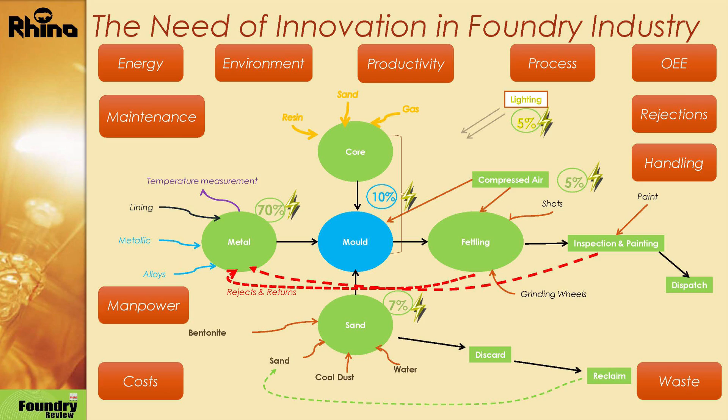The first one, which we did around 2012, we started working on an EcoFlex sand plant, a sand handling system innovation using belt conveyors instead of bucket elevators. The first foundries who embraced this were Varsha Iron in Belgaum and Sagar Ferex in Rajkot, small and medium sized foundries. We are more and more identified with MSMEs, and these companies have taken up this innovation.

One of the unique parts of this innovation is we have hosted lunch in a working foundry beside a working plant, two times in 1.5 years, and many people have seen it. The last was hosted by the Belgaum Foundry Cluster a month back, and I'll share a video link if anybody wants to see how you can create an environment which a person will enjoy working in.

So this was the users, and the innovation was recognized because of the deliverables. As I said, innovation needs to have an impact. One of the biggest impacts was a 30 to 50% lower consumption of power — installed power — which has huge value across the total foundry scenario: nearly 7,000 megawatt hours of energy every year for Indian foundries, which is not a small value. At the same time, as I was saying, it provides a healthy and safe working environment.

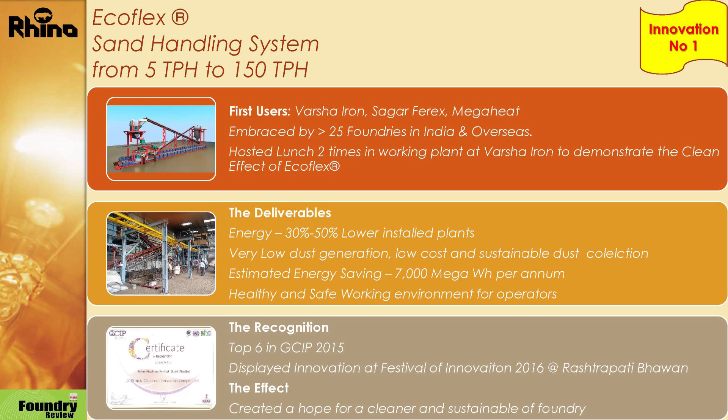The second has been the molding process. My father always used to say we'll never make a jolt squeeze machine in our life - we never used to make molding machines. But he always believed that if you want to make a machine, it has to be high pressure; otherwise, never make a copy of a jolt squeeze machine. We've been working on this since 2008, 2009, and it was displayed at IFEX 2010 when Mr. Panchal was head of that program, and we were one of 3 people recognized.

It is already working in 25 foundries. We have enabled small foundries producing 100 tons per month to upgrade their process from hand molding to high pressure molding, taking a big step forward in process control. There are 3 - PEFCO in Pune also has 2 machines right now in production, replacing jolt squeeze machines.

Again, looking at the impact, this product has once again been selected in the Global Clean Tech Innovation Program, represented by our engineer Gajendra, where we have savings of 30% as compared to compressed air - we use hydraulic energy. Combined with the reduction of weight variation, the impact we consider is nearly 31,000 megawatt hours of energy every year.

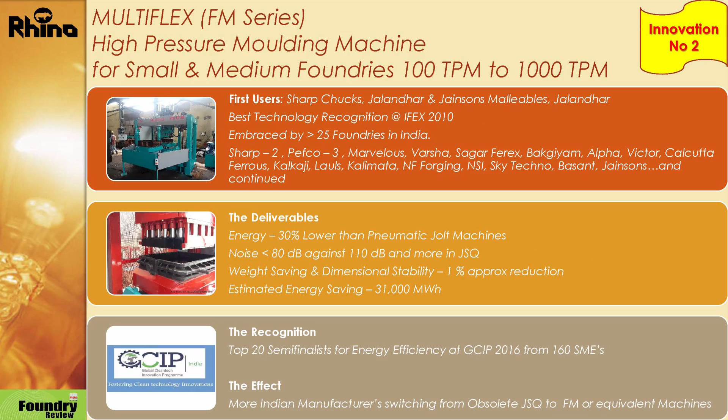The third area, which we have started working on with Fata Aluminium for the last 2.5, 3 years, has been sand reclamation. Everybody has been talking of waste and solutions - we have already done the solutions. The first solution user is Coimbatore Aquasub, who gave us this platform to put this product in. The plant is being installed right beside their existing sand handling plant, with no manpower involved. The sand is taken, reclaimed, and put back into the system. We have been able to reduce 50% to 60% of their new sand addition into the molding sand.

Sand reclamation is needed for 3 areas - I won't go into the details, it's a different subject. One is in the molding sand. The second is thermal reclamation, which is very common, and I think Dr. Gnanamurthy also has that thermal process. The third is converting from green sand to usable core sand. That technology is also available, and we are trying to implement it in India.

It's already working overseas. I still remember the words of my father - he saw this technology in the 60s. This is not something very new; it is more than 50 years old. But we have adapted it and made it viable in Indian conditions. We have not created this technology - we have innovated to ensure that this technology can be used by people and foundries.

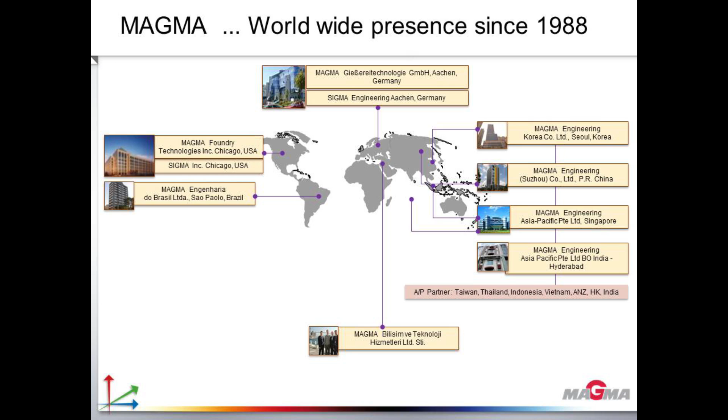This is our worldwide customer base, around 1800 customers worldwide, and we have installed 3500 licensed installations worldwide. These are our major customers around the world. So 80% of our customers are SMEs.

In India, we have our branch office at Hyderabad. We are regionally divided into north, south, west and east. So customers in India, we have reached around 100 customers in India. These are the major customers using our product.

This is Magma branch office India, our team. There are 5 technical people on the ferrous side, and 3 technical people on the non-ferrous side. One is academy, and one is IT support, which is license administration and so on. And marketing is Mr. Srikanth, and there's also accounts department, sales and support.

So this is Sigma. Sigma is one of our plastic injection molding simulation software.

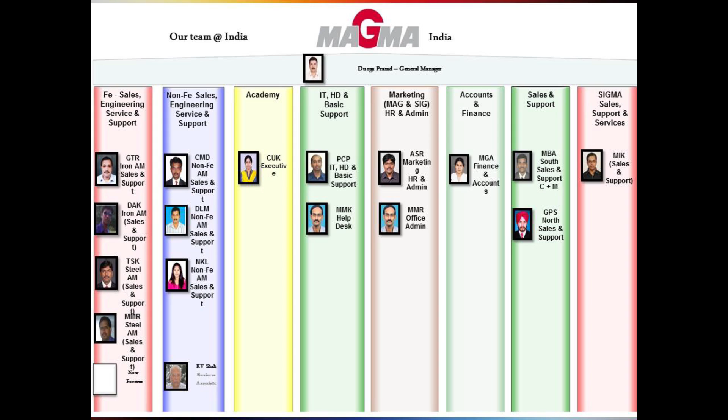Customer profile based on our applications: sand castings around 22%, HPDC (high pressure die casting) 8%, low pressure die casting 8%, GDC 15%, investment casting 6%, sand casting steel applications 30%, and Disamatic those are using 11%.

So in present conditions, reaching the improvement in casting process today, initially they develop castings in 3D modeling and do some methoding. Based on the models of castings, they make the runner risers, and import into the simulation software, and run individual simulations. First they import the designs and analyze, then if it is wrong, they go for modification of designs.

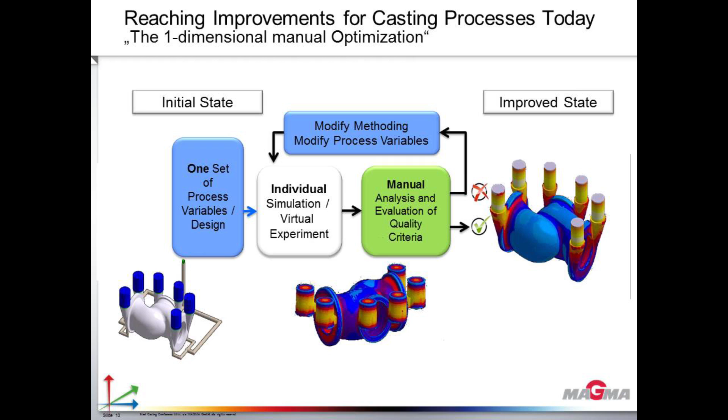So it will be a cycling process. Once you get good achievements, it goes to the final product - an improved state going to production. So this is the present condition, which is using simulation software in research and development to develop the castings.

But Magma is introducing a new methodology in foundry applications, which we can call optimization. So how does it work, how is it a virtual test field in this.

Process variables - what are the process variables we can use? Design variables like chills and locations, riser variables, machining allowance padding, local cooling rate, steel grade compositions, gradient, feeder dimensions and locations. These are the process variables. We can combine process variables as well as design DOE - we can say design of experiments. Both we can include here.

Next, quality criteria - what are the quality criteria we can expect during development of castings? They have to achieve zero defect porosity, and the metallurgical and mechanical properties. So inclusions, defects, and crack-wise - what cracks are they facing in the castings?

And objectives - production-wise objectives: minimize porosity, realize the property in a specific range, and maximize yield to productivity. So all these criteria we are considering in the optimization at a single time.

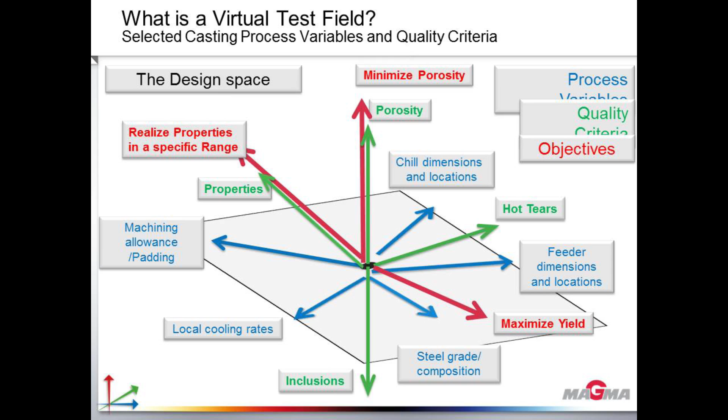So how does it work? This is the present situation which we already discussed: individual simulation, manual analysis, then remodification. If it is okay, then going to build. So this we can call one-dimensional optimization.

But in Magma, we are introducing process variables - that means we analyze process variables, what chemical composition changes, sand property changes. These are the things. And DOE - design of experimental - riser design change, and gating dimension changes. All these things we implement at the same time.

So what will happen during simulations? Automatically it will take the designs, modification designs, whatever inputs you give - lower limit, upper limit - those inputs the simulation will automatically take. So it will run the simulations. This is what we can call the virtual design of experiments, including process as well as DOE.

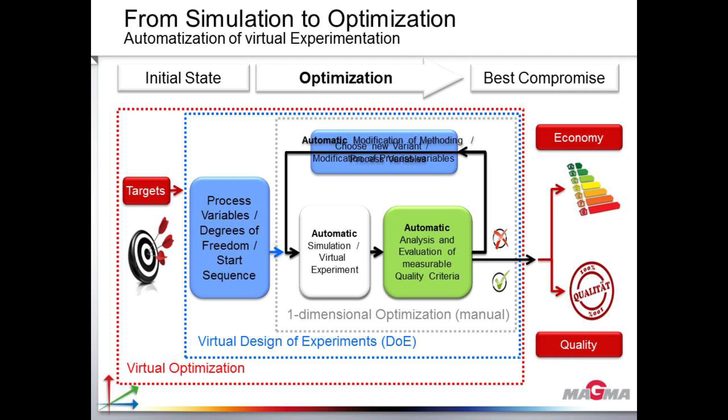So our target is virtual optimizations. If you do the optimization method, you will get good economics, and we can develop quickly, reducing development time, and achieve good quality castings. So the best compromise is overall optimization.

Here I would like to present some case studies related with our DOE, design of experiments.

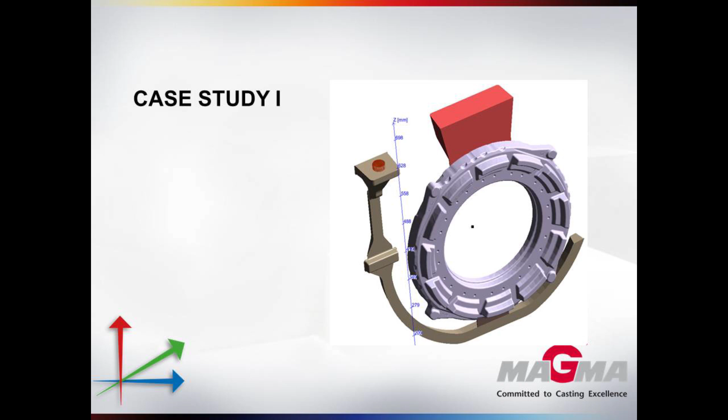My objective for this project is to reduce porosity, increase yield, and reduce in-gate velocity. If you achieve low in-gate velocity, you can control sand inclusions, oxidation inclusions, and air entrapment issues, as well as reduce air pressure.

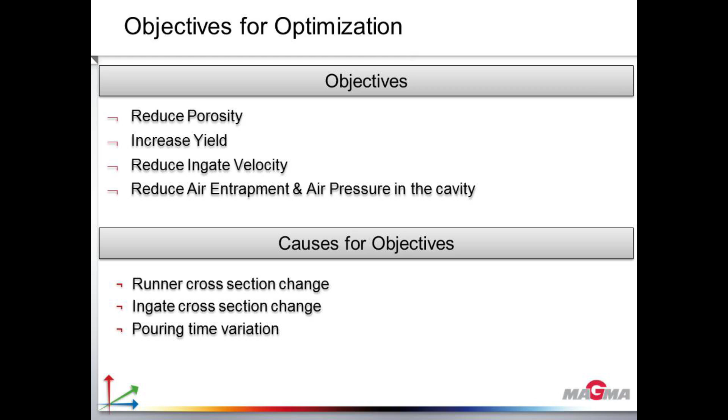So what are the things I need to change here? Runner sections, the ratio of in-gates, in-gate cross section, and pouring time variations.

Here runner and in-gate cross sections have 6 different sizes, and pouring time has 4 different times, giving total possible designs. These are my different designs to implement as single simulation iterations. Implementing these 2 conditions at a single time, total designs I got were 24 designs.

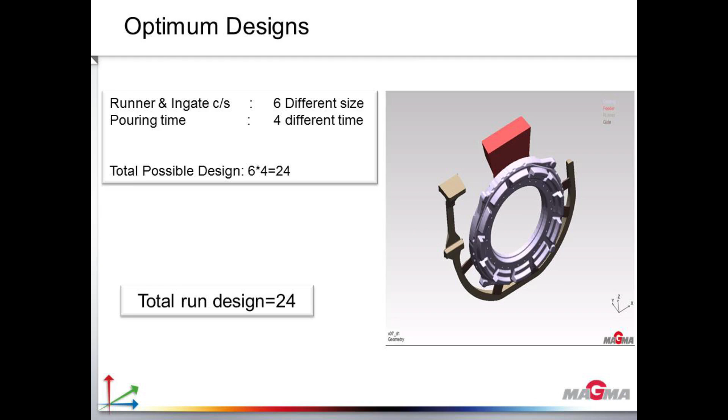What are the quality criteria we can consider here? In Magma default we have quality criteria like, during filling, balanced filling, smooth filling, balanced flux, reduced in-gate velocity, and aligned melt. These are the different kinds of quality criteria during filling as well as solidification related.

The solidification-related criteria we can see are reduced porosity, reduced microporosity, reduced hotspot, FS time, and production-related we can say reduced cycle time. For example, non-ferrous people have to reduce cycle time as well as fill time, maximum cooling rate, and increase yield.

These are the main quality criteria we consider during simulations, as well as the objectives we can consider, such as reduced gate velocity. Whatever objective we need, we have to select it during the simulations.

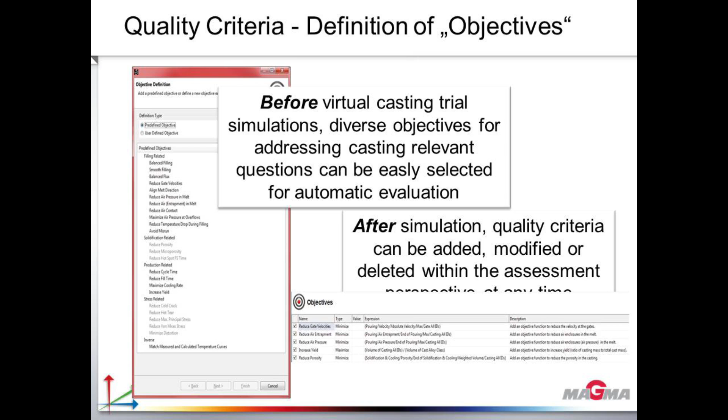So here we take statistical analysis to analyze the designs. Whatever we run in the 24 designs, it will give a ranking system - which is rank 1, which is the final rank - based on our objective.

This is the objective we consider: increase yield, reduce air entrapment, reduce air pressure, reduce gate velocity, and reduce porosity. All objectives are considered with maximum level of weightage, and it gives rank 1 - our rank 1 is the 10th design.

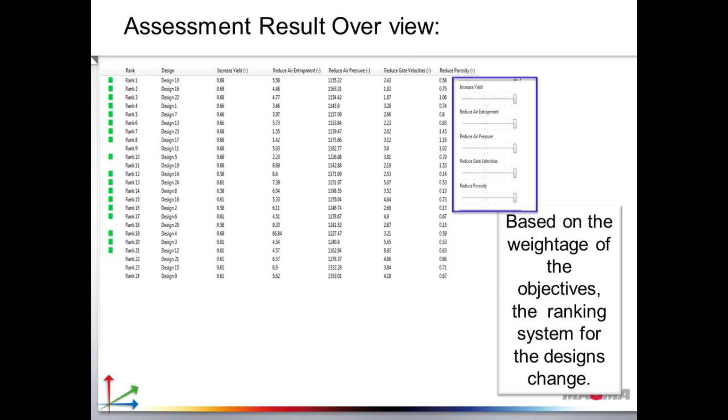So we run the single simulations. In the single simulation we got 24 designs, and in these 24 designs we get the ranking system, quantifying the results based on our quality criteria. So the 10th design is the best design.

One more statistical analysis we can compare is porosity versus yield. The blue color indicates porosity variations and orange color indicates yield variations. Here we can see less porosity as well as yield also very less - this is the yield in orange, and the blue is porosity, which is less, yield also is less.

So an acceptable level of porosity we can accept and take. We can take average porosity as well as average yield. Then maximum level of porosity we are not considering, because that means the casting defect is more. So we can consider the average level, concentrating on yield, productivity, and quality of castings.

So this is one of the statistical analyses to predict good quality castings.

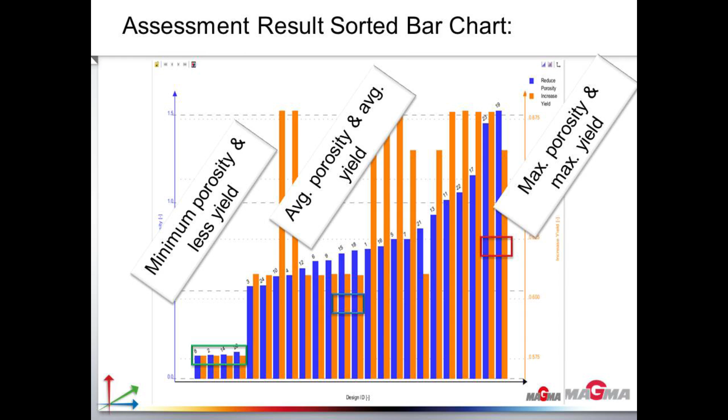One more statistical analysis we can use is the scatter chart with bubble size. Based on the bubble size, we can see reduced air pressure. If we reduce air pressure, we can control air entrapment as well as air-related issues like gas porosity and scabbing.

Wherever the bubble size is small, it shows that the air pressure is very low during filling, so we can concentrate on the designs with less bubble size. As well as we have to consider porosity - wherever showing the minimum level of porosity, we can achieve that with the 10th design.

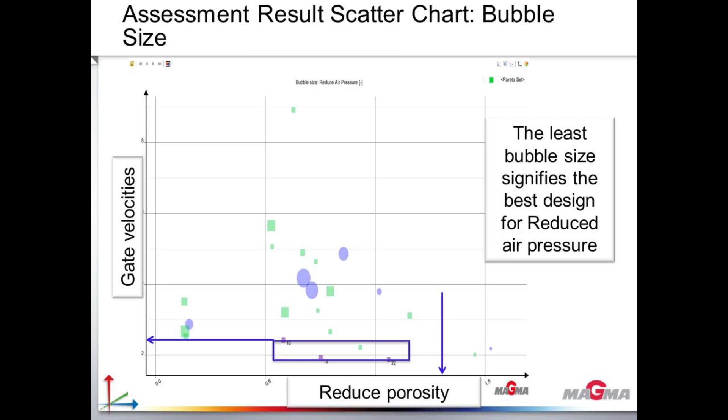And one more, based on the gating, the in-gate velocity, we can consider which is the best one, the 10th design. The in-gate velocity should be less, as well as reduce porosity. Based on the porosity we can make this assumption.

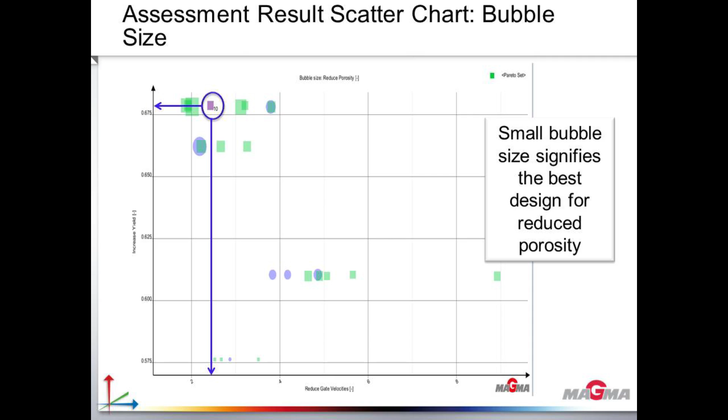One more statistical analysis, here we can consider all input variables as well as the output variables. So whatever input variables, pouring time, and different in-gate geometry we are given, that's the input. Output variables are air entrapment, air pressure, in-gate velocity, reduced porosity, and increased yield. So all these things we are considering. Let me check our first premier objective: increase the yield.

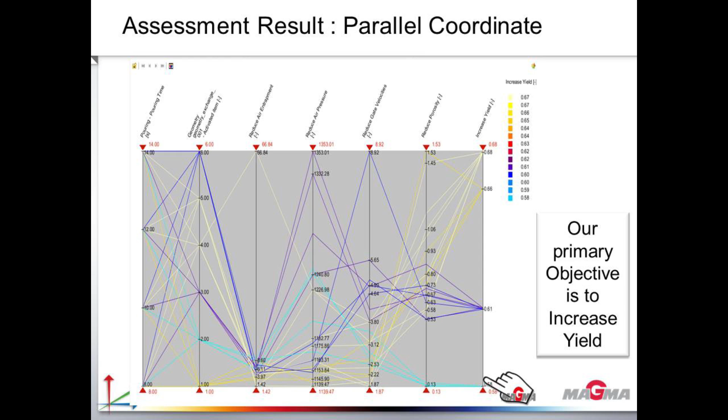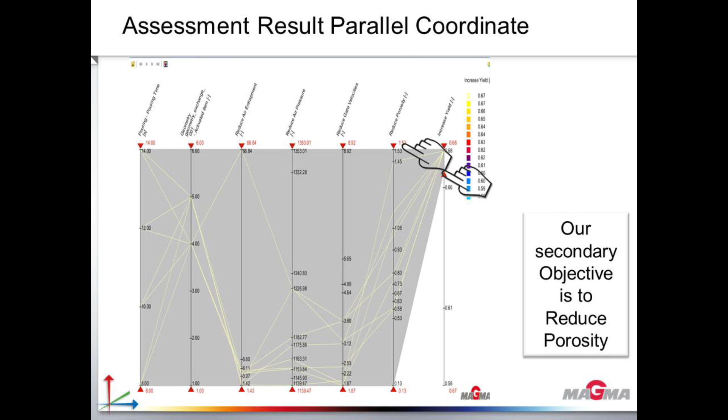So these lines are indicating the maximum level of yield percentage. My secondary objective is reduce porosity. So at that level of yield, the 68% yield we are getting, which has minimum porosity, and we can get the pouring time, which could be 10 seconds.

And what is the geometry, the fourth geometry will be a good design, and the air entrapment will be less value, air pressure will be lesser value, and gate velocity also lesser value. So porosity is minimum and yield is maximum. As per our objectives, the selected design, the 10th design, is showing the best design.

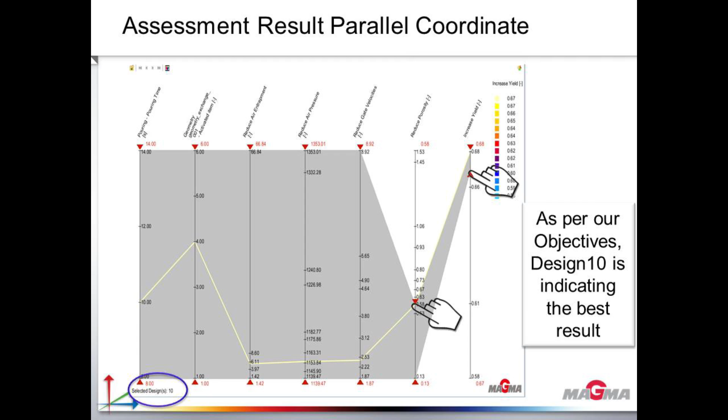Initially, based on different geometry, we look at the in-gate velocity. Initially it will be higher velocity, so air pressure will be high. Once the gate velocity is reduced, your air pressure will be reduced.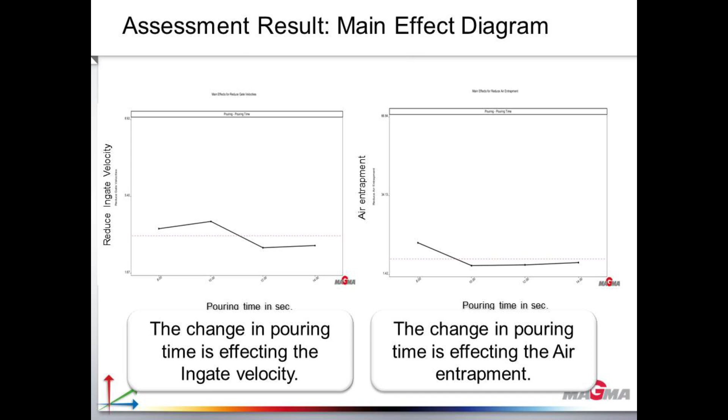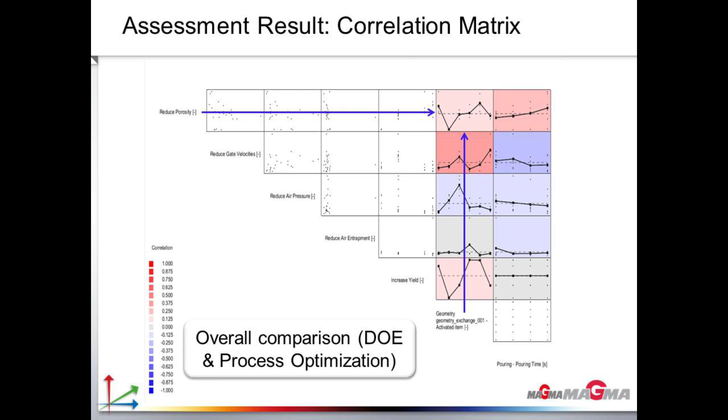So this is the overall correlation matrix. Whatever we discussed in the main effect diagram, it will conclude: reduced porosity and the geometry exchange relationship. Based on that, reduced gate velocity as well as pouring time will affect this.

The effect can be shown as positive correlation and negative correlation. The red color shows positive impact, and the blue color shows negative impact.

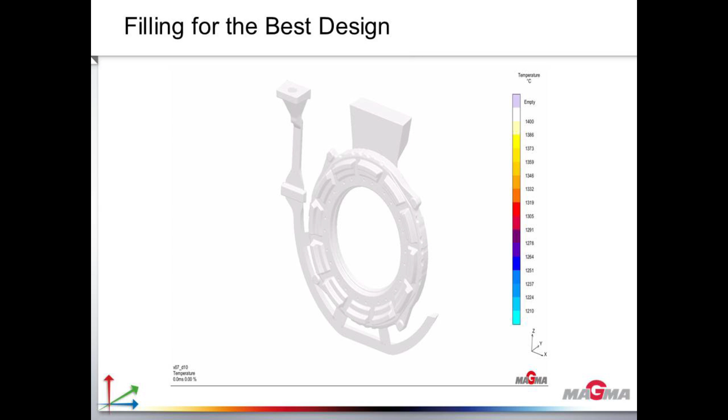So this is the best design, which is the 10th design. This is the solidification results. This is the porosity of the different gating systems with porosity images.

So the second case study which we are going to discuss now is this one plate type iron casting. This casting is not failing at the quality level, it's failing at the application level, where within one year of application the casting gets breakage.

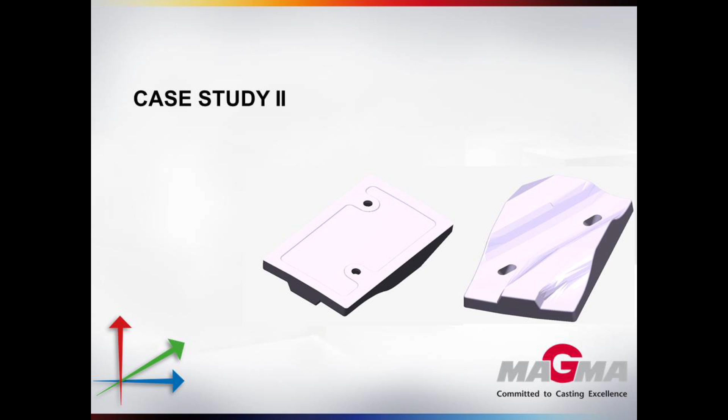Let me see what the issue is on this one. This is the casting for which they made the methoding. We are analyzing the results with the differences. They made service crack noticed at the marked locations. The Magma software shows the microporosity over here.

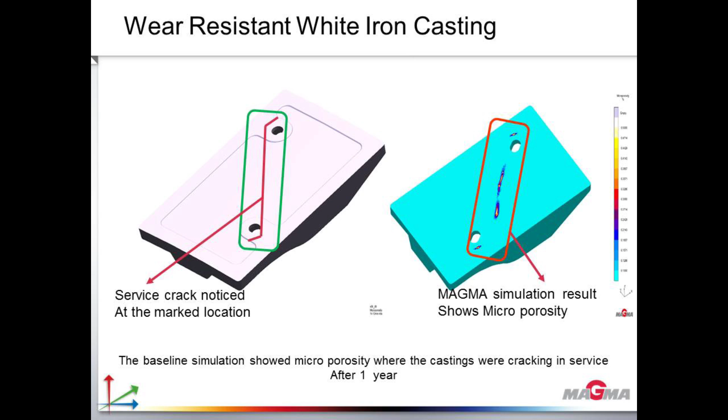So what happens during applying the load? Due to this microporosity, the casting gets breakage after one year. So we are analyzing with simulations, based on our size of risers as well as distance between those risers. The distance between risers can help reduce the microporosity level, which we can check in the simulations.

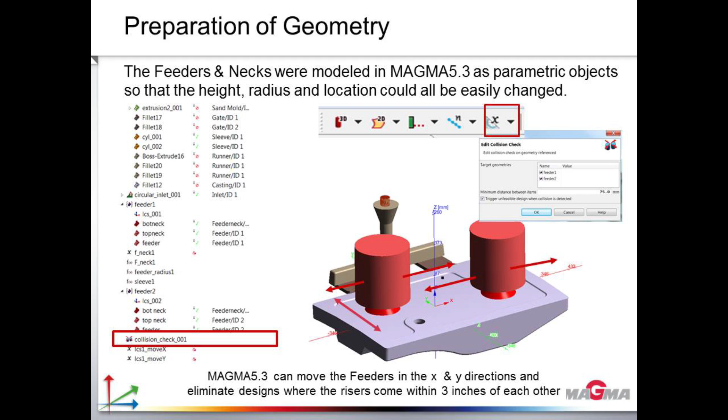So these are the different designs we are considering, varying by distance and riser size, to see how it affects results. My objective is to reduce porosity, reduce microporosity, as well as consider productivity by increasing yield. The possible designs give me 27 options.

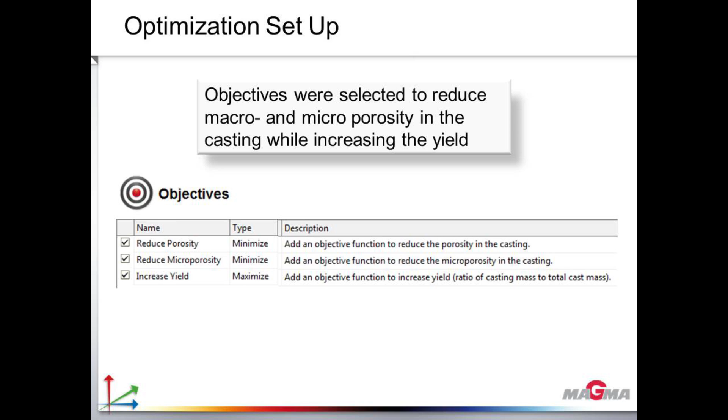Based on the ranking system, using the same statistical analysis, the 14th design is giving the least microporosity.

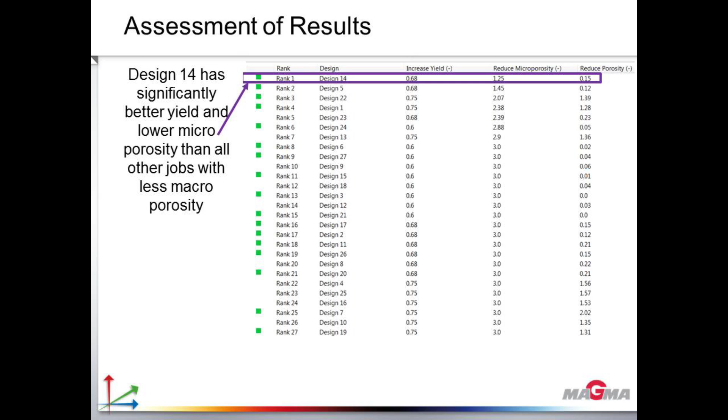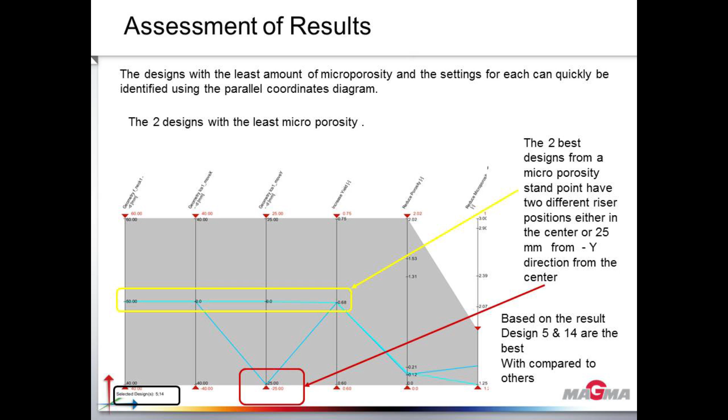So here in the 14th design, the microporosity is less, and the yield is moderate. Considering the statistical analysis, and the reduced microporosity seen here, I select the 5th and 14th designs as the best designs.

Similarly, the microporosity is based on the neck size, the riser size, as well as the distance between the two risers, and the movement of the LCS, which location is preferable.

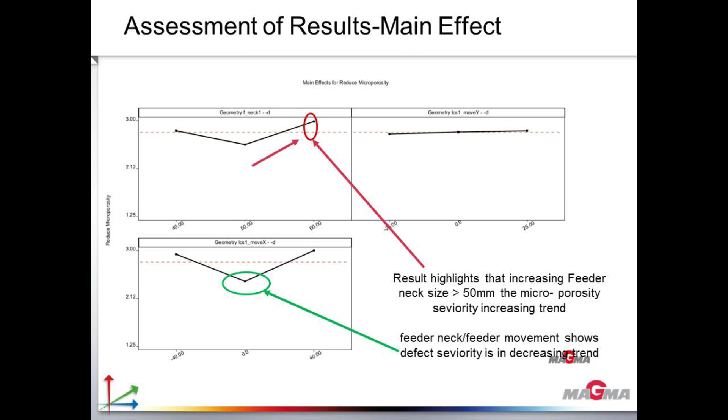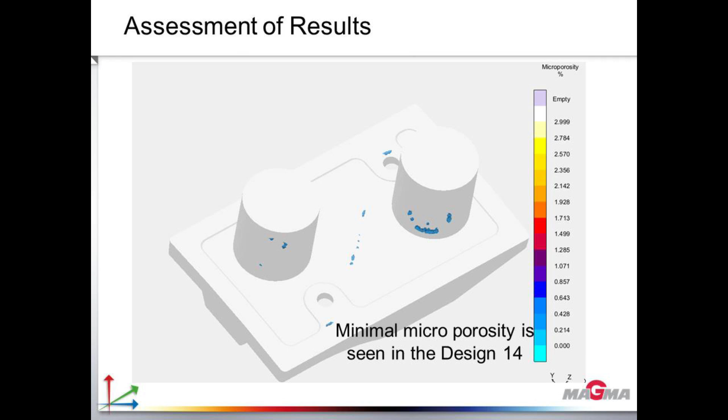This is the minimum microporosity we are getting from these designs. The 14th design gives the minimum level of microporosity. So these are different designs based on microporosity with different riser sizes.

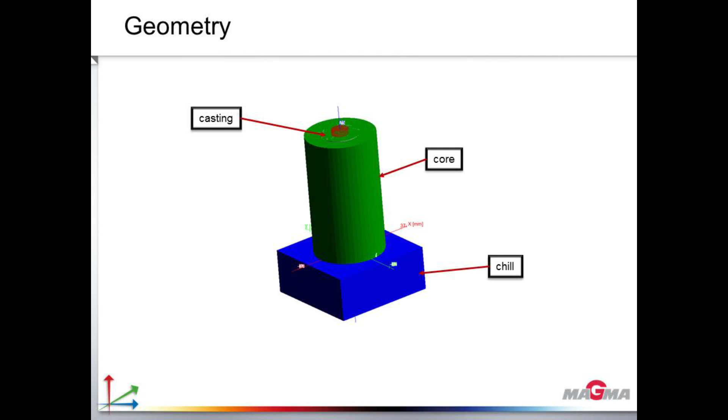Next, optimization of mechanical and metallurgical properties, and how they are affected during chemical composition changes. This is the geometry of the case study, with casting, core and chill, using GJL 150, the initial temperature, and the inputs we are taking. The total possible designs here are 15,000.

So, carbon alloy, the carbon percentage.

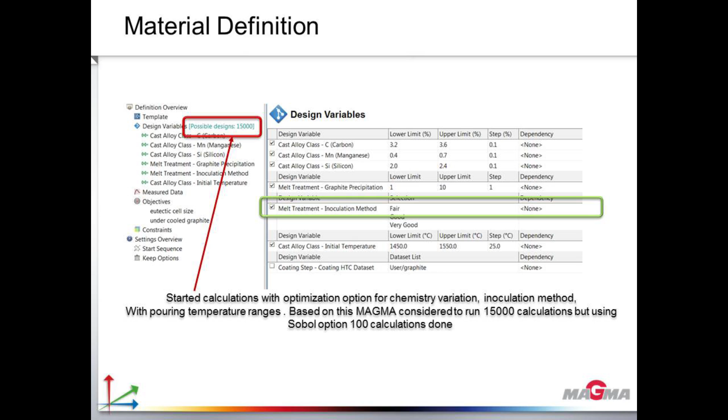Let me discuss the results. This is the eutectic cell size, how it will vary. If it is initial temperature, there is no effect on eutectic cell size, and silicon percentage also has no impact.

We can see inoculation's effect - if we change the inoculation method, fair to very good, using in-furnace, ladle, and in-mold stream inoculation, the eutectic cell size will vary.

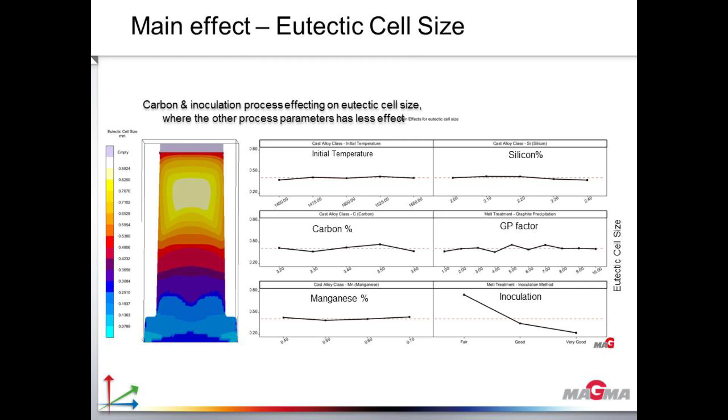There is no initial temperature impact, but carbon impact occurs - after 3.5% carbon, the eutectic phase will increase, and inoculation will also increase it.

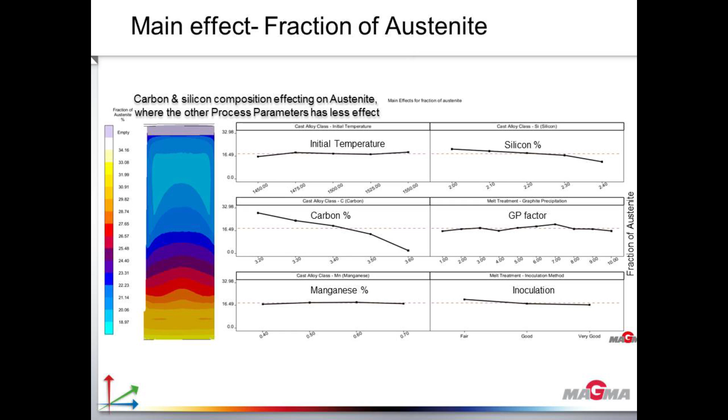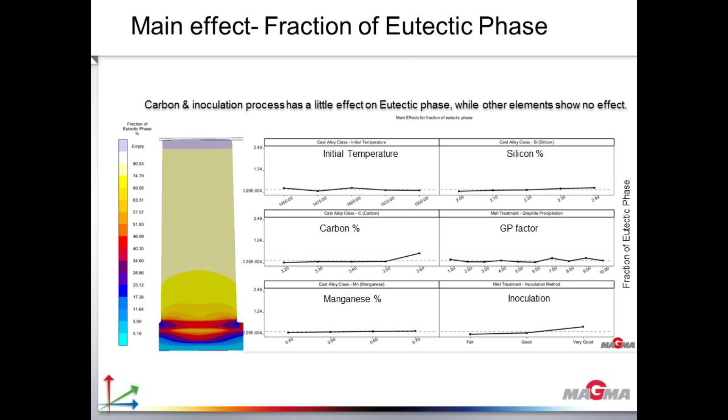And undercooled graphite - sometimes it will vary based on carbon percentage. The impact will happen from carbon percentage as well as the inoculant method.

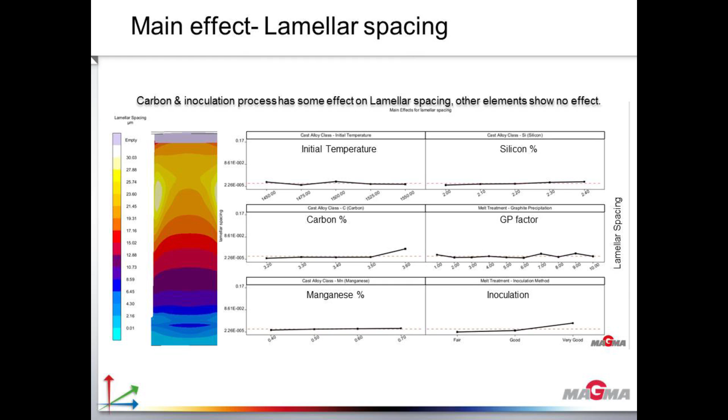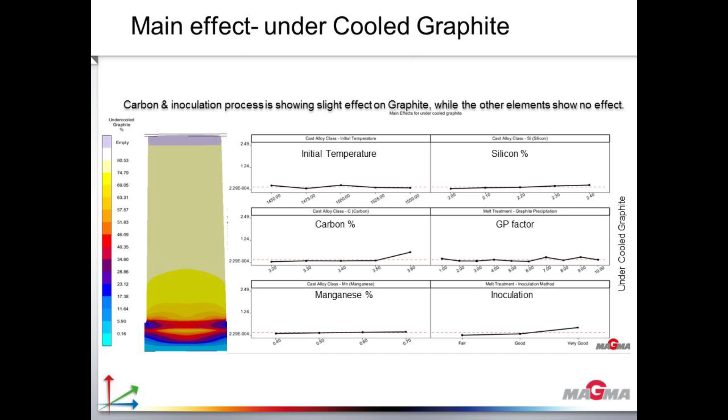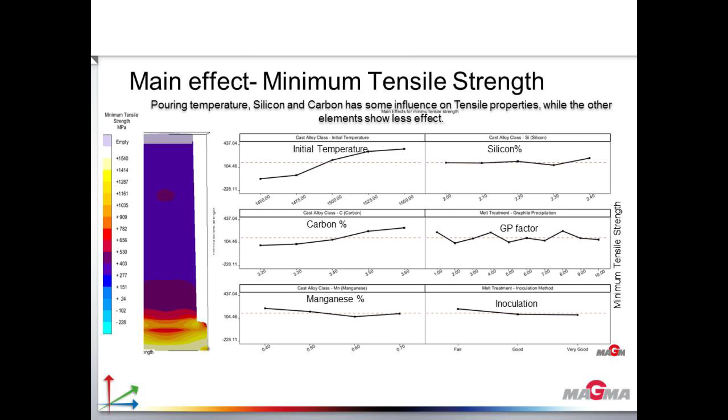This is the mechanical property - minimum tensile strength. Initial temperature and carbon percentage will cause variations in tensile strength, and silicon percentage will also vary it.

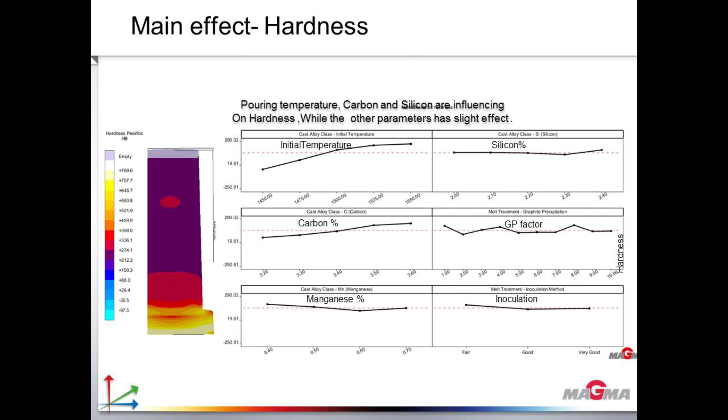For hardness prediction, if you change the initial temperature, the hardness will vary. If you change the carbon percentage, the hardness will vary. There's no impact from silicon percentage or graphite precipitation, and inoculation has no much impact on hardness - only initial temperature and carbon percentage variations matter.

For the Young's modulus of castings, when carbon percentage varies, that's the main factor - otherwise there is no input that impacts the Young's modulus.

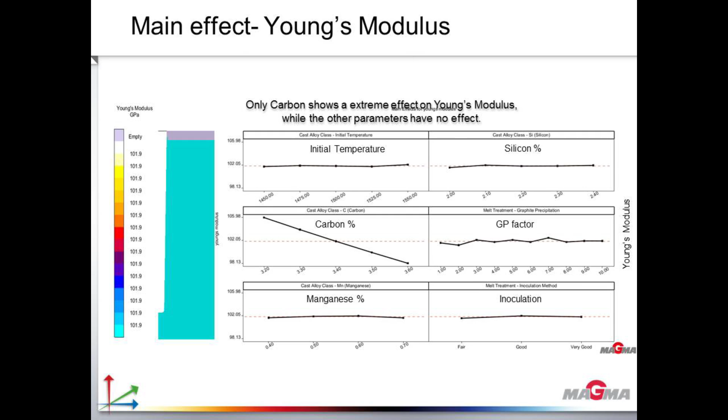One more new product we are introducing into the market is Magma Express. This helps only with basic filling and solidification, not for mechanical and metallurgical predictions or quality criteria - whatever defects we face in the foundry. Without optimization, we can run simulations using Magma Express.